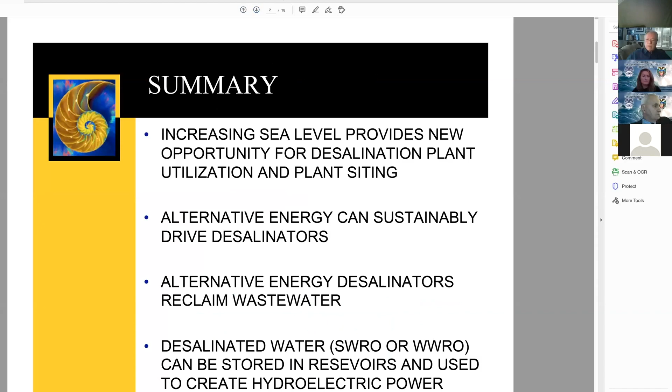In summary, what I'm going to do is - please bring up the slides, Todd. Let's go to the second slide. All right, let's go to the next one. So basically what I'm talking about for desalination is using alternative energy to sustainably drive these processes. Alternative energy can also be used for reclaimed water, for wastewater reclaim. And extrapolating into the future, you could also use desalinated water to fill reservoirs to create hydroelectric power, which gives you a very interesting source of water in off-peak and non-daylight periods. Next slide, please, number 3.

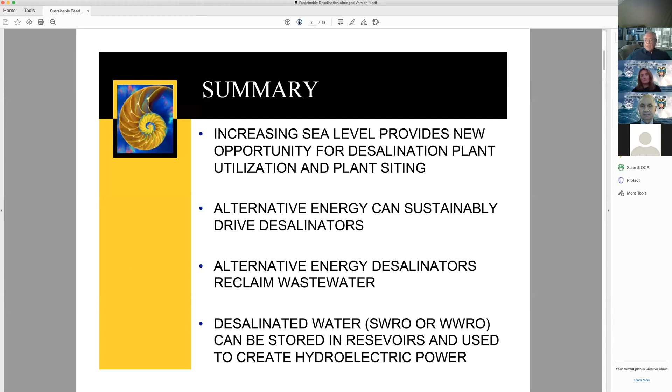The Legislative Analyst's Office of California's report from August 2020 indicated that sea level rise was going to cost California $8 to $10 billion by 2030, with as much as a 1-foot increase in sea levels. By 2100, this could reach a 7-foot increase, and storm surge could increase it significantly. We've had a king tide here just in the last day. Slide number 4, please.

Desalination growth has also been going on at the same time. Globally, water demand has resulted in incredible growth in the use of desalination to provide a reliable source of water, driven by global population demand. You have increased water consumption, but you also make more wastewater when you do that. These cities that consume more water produce more municipal wastewater, which is an opportunity for desalination to recover that water.

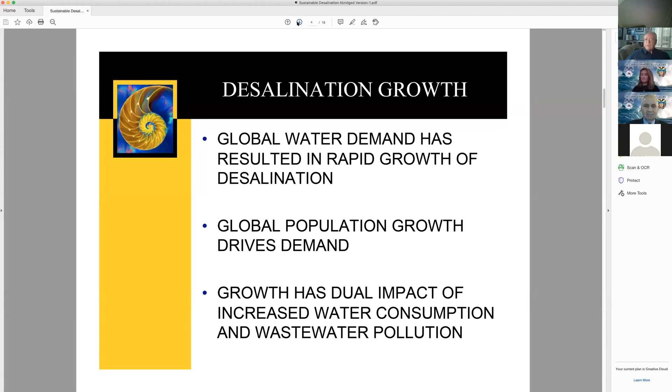If you look at the global growth in desalination, in 2015 there was about 528 million gallons per day of seawater reverse osmosis being installed globally on that annual basis. By 2019, it was up to 2.1 billion gallons a day, growing at about 40% per year in the use of seawater desalination around the world. Wastewater is not growing as rapidly, largely because it gets used predominantly in developed countries, but it is showing a burst of growth right now as people recognize the importance of wastewater reclamation and what a good tool it can be.

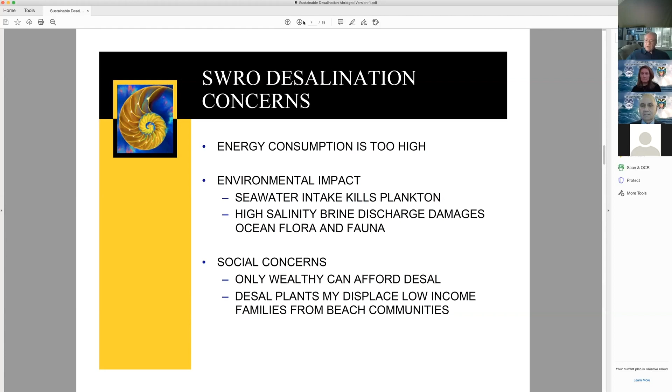There is a non-fossil fuel way of using desalination technology, and that's what I want to talk about and hope we can do here in California. There's a technology where you submerge the desal plants and operate them without fossil fuel consumption, using the hydrostatic water pressure of the sea to drive the process. You can use solar or wind power to transfer the fresh water to the shore. If you use fossil fuel to transfer the water from these seawater plants to shore, it saves 50% of the cost of a land-based desal plant. But if you can use solar or wind power, then you reduce that energy consumption to virtually nothing other than the capital cost to put in the solar and wind power plants.

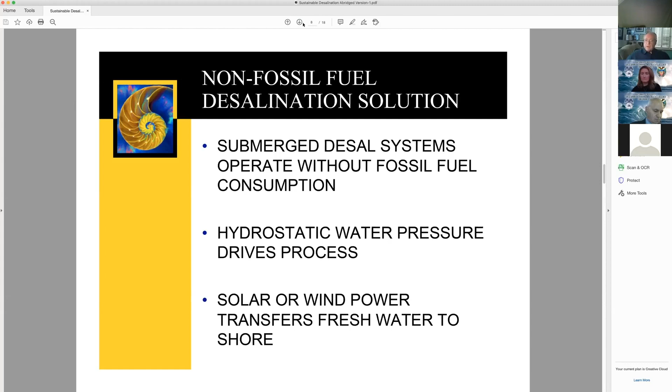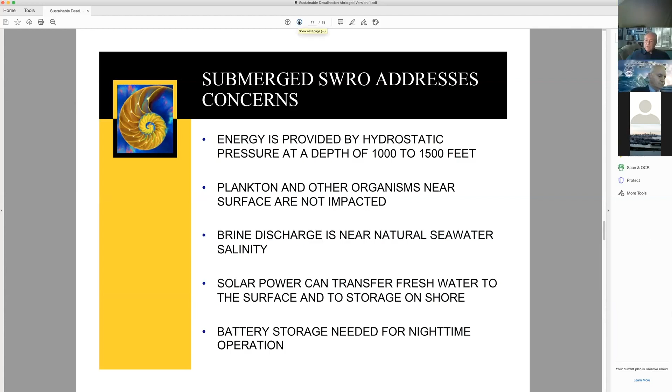Submerged desal plants have a slightly higher capital cost. Location requires about 1,000 feet of sea depth, not too far offshore. You must have the solar system coupled with the desal plant, and you will need a battery pack. But you have a new water supply without fossil fuel consumption, which helps California reduce its CO2 footprint, and this would do the same anywhere else it was used. This should help us with global seawater or sea level rise concerns. Next slide, please.

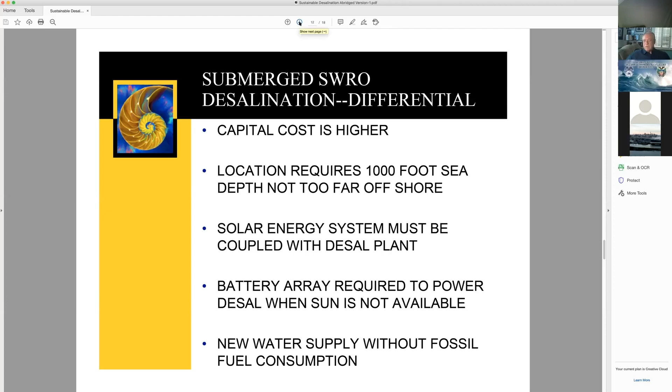Wastewater can also use alternative energy and be driven by it. You cannot use hydrostatic pressure like you can with seawater, but it is used heavily for recycling municipal and industrial wastewater. It is growing fast, not as fast as seawater, but growing. Approximately $800 million was invested in 2019 in wastewater reverse osmosis installations, and it uses less energy than seawater RO, even when using fossil fuels. That's one reason it has been widely adopted in the United States and other industrialized nations. Next slide, please.

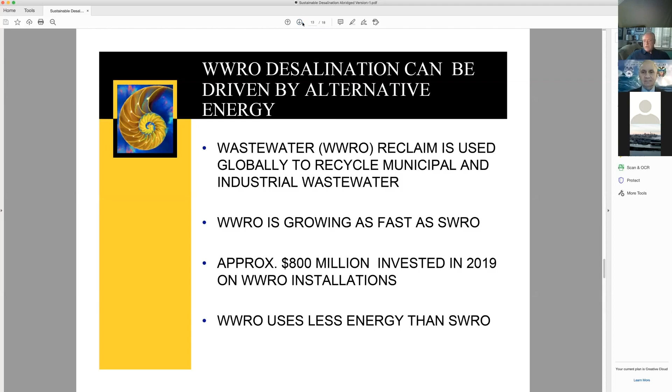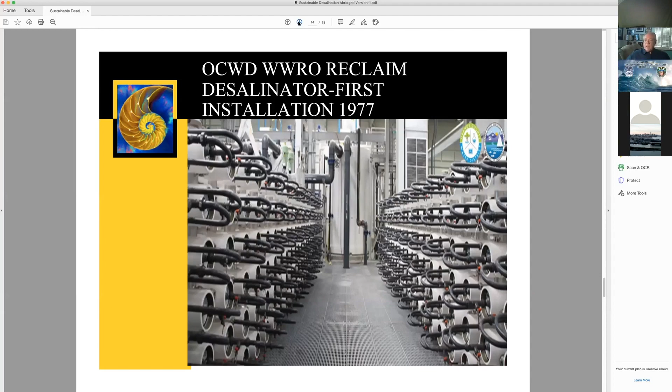This is a picture of the Orange County Water District wastewater recovery plant, which they call their groundwater replenishment system. They take the recovered water and put it into the groundwater, where it mixes with their natural drinking water and also prevents seawater from intruding into their natural wells. This plant was originally installed in 1977 and has been expanded a number of times, currently producing 130 million gallons a day of drinking water for the Orange County, California area. Next slide, please.

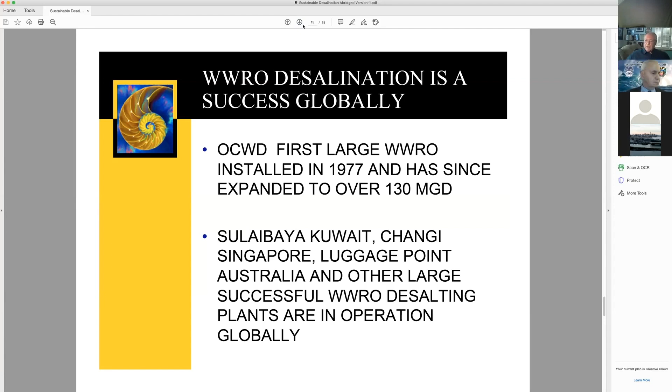Orange County was the first and the biggest so far. However, these plants are all over the world, in Kuwait, Singapore, Australia, and there are many other very large successful wastewater desalting plants. So this is catching on widely on a global basis. Next slide, please.

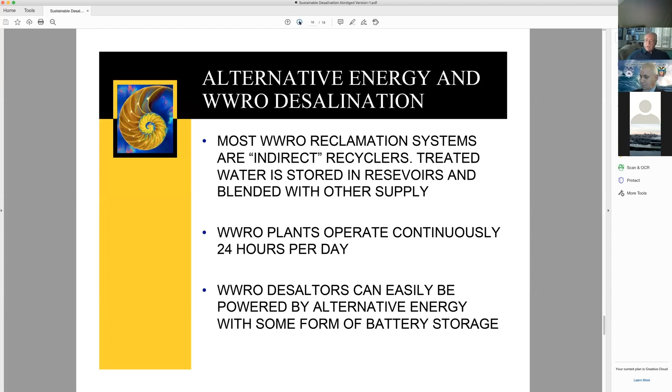Most wastewater reclaim plants are indirect recyclers. That is, they treat the water and then put the permeate, the drinking water, into a reservoir or, in the case of Orange County, into their groundwater wells where it blends with naturally occurring waters. Wastewater plants operate continuously 24 hours a day. They can easily be powered by alternative energy like solar and wind power, and would need some form of battery storage for nighttime operation. Next slide, please.

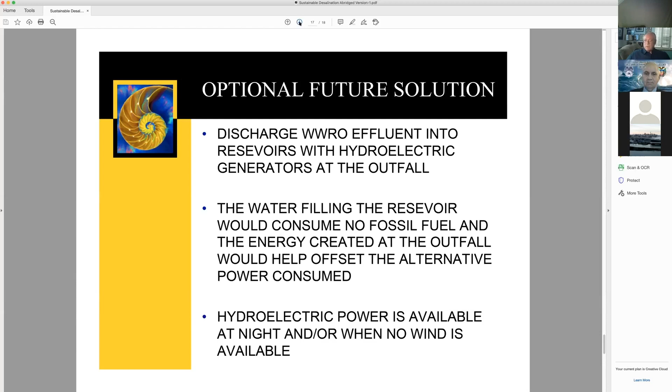An optional future solution, and this is stretching things significantly, but it has some merit. This idea came from a gentleman who wrote an article in a newspaper recently that Stas passed off to me: discharge from wastewater effluent into reservoirs, where the outfall of those reservoirs could include hydroelectric generators, so that before the water gets used, it passes through the generators to produce some power. Filling the reservoirs with water does not consume fossil fuel by itself, though it would consume fossil fuel to fill them unless you can use solar power to do it. The energy created from the outfall would help offset this and gives you a source of energy at night, which is one of the real nice benefits of hydroelectric power. Next slide, please.

So basically the proposition is that sea levels are rising, the use of fossil fuel and internal combustion engines is being restricted, new sources of fresh water are needed, and desalination powered by alternative energy can provide a solution addressing all of these crucial issues. So that's my presentation, Stas. Thank you very much for the opportunity, and if there are questions, I'll be happy to address those.

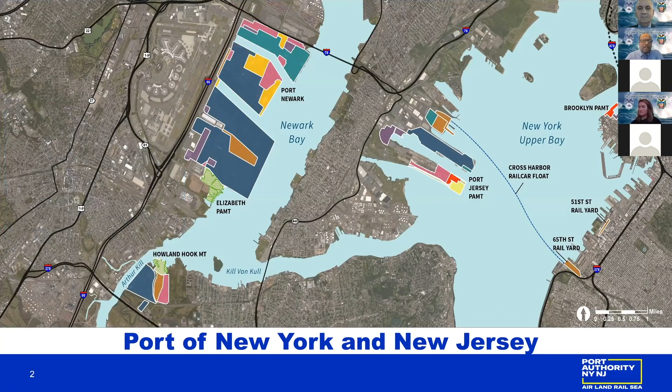Superstorm Sandy struck the port on October 29, 2012, with winds up to 90 miles per hour. As depicted in the photos, extensive flooding occurred due to the storm surge along with a high tide. The New York Harbor recorded storm tides of more than 9 feet above mean higher high water. In preparation for the storm, waterways closed on October 28th and did not fully reopen to vessel traffic until November 4th. Our facilities incurred $112 million in damages. Our individual port tenants claimed as much as $17 million in damages. The impacts of this storm included limited capacity for weeks with major supply chain effects, lack of electrical power for several days, damage to cargo handling equipment, imported autos, cargo loss, temporary flooding, and destroyed crane motors.

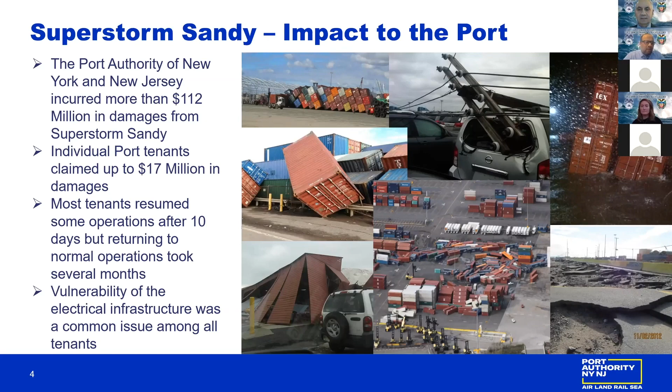One common vulnerability across all of our tenants was the electrical infrastructure, which was flooded during the event. So what do we do about it? In the short term, we updated our hurricane preparedness plans to identify high ground staging areas for equipment to ensure that they didn't get flooded or destroyed again. We also executed a Sandy recovery program, partly funded by FEMA, to replace the damaged infrastructure and upgrade facilities to protect against future storms.

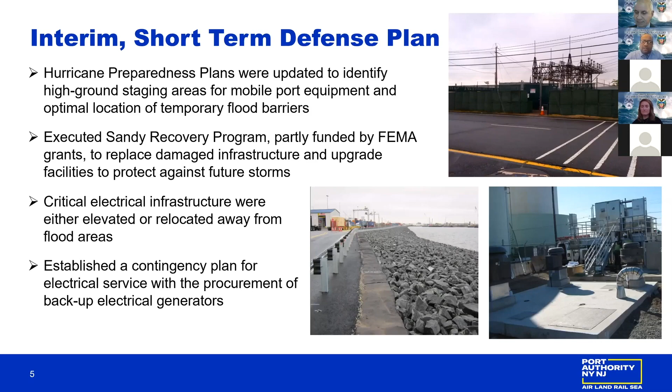As a lesson learned, critical electrical infrastructure were either elevated or relocated away from flooded areas. And we established a contingency plan with our partners to make sure that we had available backup electric generators against a future storm.

As far as the long term, over the past several years, the U.S. Army Corps of Engineers, with the collaboration of non-federal partners and other regional agencies, have been studying the feasibility of protecting the entire New York, New Jersey harbor. The alternatives being studied range from no action to surge, gate, and flood wall alternatives.

Though this study is currently on hold pending federal funding, it represents the region's holistic response to future storms as far as defense. If this study were to yield a project, a structure like this will serve as a first line of defense for the port and the rest of the region.

Though this is an ambitious project and hopefully will become a reality in the future, it will take many years before it's implemented. The Port Authority has already updated its resiliency and sustainability design criteria in order to protect our facilities against future storm events.

Every project needs to comply with the criteria, which includes the analysis of sea level rise and wave action, and the selection of flood event based on the specific location and service life of the new infrastructure. Sarah will provide more details on this in the next slides.

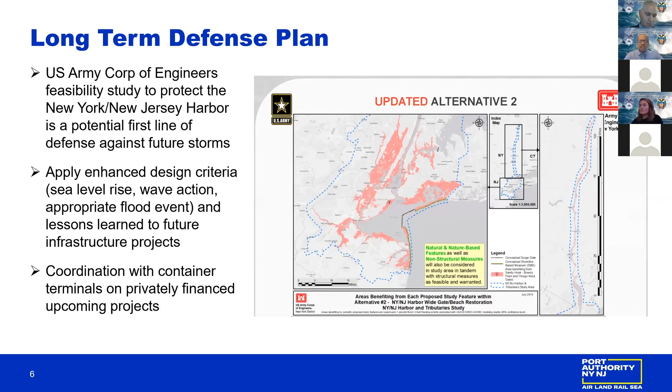Additionally, the port actively coordinates with our tenants on the inclusion of resiliency and sustainability into the privately financed projects that they are executing. My last slide today is going to talk about the wharf replacement study.

We studied this a couple of years ago to ascertain the condition of our 13 miles of existing wharf system so that we could provide recommendations as far as rehabilitation and reconstruction. One of the major challenges and decision points throughout this study is whether to rehabilitate or reconstruct our wharf system to a new elevation to comply with new standards.

Based on a worldwide outreach of our industry, what we found out is that for new port facilities, they build to the new elevation criteria and new resiliency criteria. However, for existing infrastructure, for the most part, they remain at existing elevation.

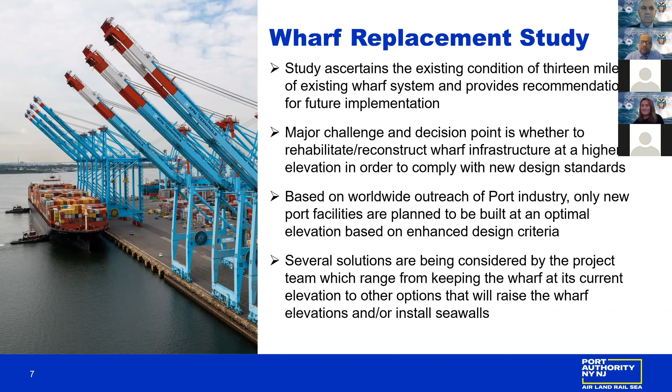And obviously, in the study, several solutions are being considered by the team - again, keeping the wharf at the same elevation, or raising the wharf elevation, or even the thought of installing seawalls to protect our facilities. With that, I'll turn it over to Sarah, who will provide you with more details on our criteria.

Sarah? Hello, thank you, Jorge.

Yes, my name is Sarah Colacerdo, and I'm the Senior Climate Resilience Specialist in the Engineering Department at the Port Authority of New York and New Jersey.

And you all know that port facilities are on the front lines of climate change, and I want to thank the Propeller Club of Northern California for having us and convening all of these experts and leaders and practitioners from around the world to share ideas on how to adapt to climate change's impacts.

So I want to start by acknowledging how lucky I am to work for an agency that has recognized and championed climate resilience for a pretty long time. In 2008, our Board of Commissioners updated our sustainability policy to mandate that the agency develop strategies that reduce the risk posed by climate change to its facilities and operations.

And prior to this update, the sustainability policy was essentially geared towards reducing greenhouse gas emissions, whereas the update explicitly recognized that some amount of climate change is baked into our future, and we need to understand, anticipate, and adapt to these impacts. And I really can't overstate how important it is to have an adopted policy that provides a solid foundation to address climate change, no matter what the political climate is.

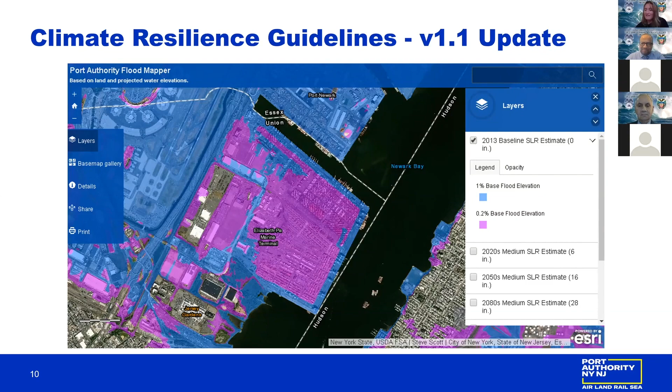Through experience and vulnerability studies, including the wharf replacement study that Jorge mentioned, the engineering department has learned to screen ports projects for various climate-related vulnerabilities. When we approach a project, we try to think broadly about potential impacts, including those that are creeping and chronic, those that are acute and short-term, and also interdependencies and cascading impacts. The goal is to bake in resiliency into every small, medium, and large project.

Some general impacts we anticipate if we were to not take resilience measures would include higher storm surge elevations damaging electrical and mechanical equipment and crane motors, the relative air draft of ships to wharves and mooring systems changing, possibly placing greater or different stresses on the existing fenders and mooring systems, creeping submergence of our outfalls, which would reduce the effectiveness of our drainage system, reduced underdeck clearance that might lead to more challenging and more costly underdeck repairs and inspections, accelerated deterioration of bulkheads due to continued flushing or inundation that could lead to loss of fill and subsequent upland sinkholes. And in the lowest lying areas towards the very end of the century, we think we might start to see inundation during high tides causing nuisance flooding.

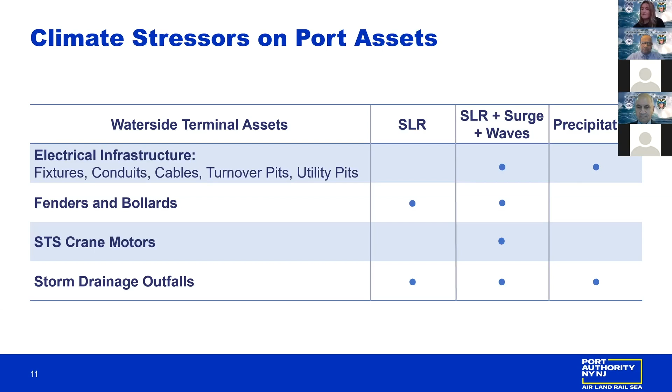Continuing upland from the water, we're mainly worried about storm surge events and to a lesser extent, extreme precipitation, which without resilience measures could lead to higher and more extensive storm surge, damaging buildings and cargo and electrical and mechanical equipment and crane motors. Rising groundwater and the reduced capacity at the outfalls could lead to reduced drainage capacity throughout the system, and overtaxing the system, or maybe too small of a system, would compound the issues of extreme precipitation causing potentially ponding and sinkholes.

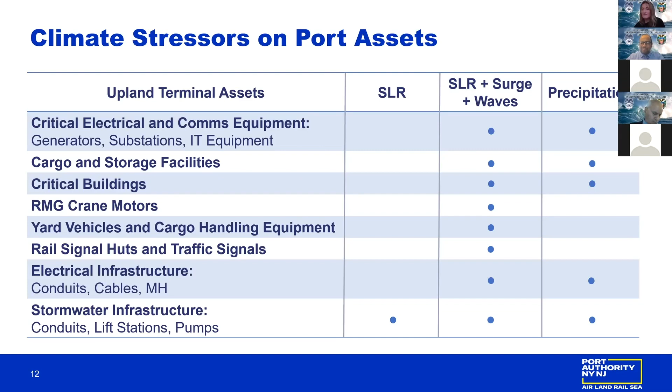As an engineering department, with every challenge we add to our menu of design options to try and increase protection at our ports from climate impacts. Some strategies require complete implementation across a facility before they create value, while others can be effective as individual or incremental projects that can be scaled and layered to increase protection. These design strategies include raising, enlarging, or increasing the number of outfalls, installing backflow preventers, protecting critical assets by elevation or dry and wet flood proofing, constructing seawalls at the perimeter, and when building new facilities or replacing wharves, looking into raising the wharf deck or adding provisions for future deck raising and/or adding seawalls.

We've heard the term adaptive capacity a couple times yesterday and today, and that's really important to us, especially when you don't know for certain what magnitude of sea level rise we might eventually experience, especially with really big investments. One example of adaptive capacity is adding structural strength to new wharves so that in the future, if need be, we can raise the deck or add a seawall, or both.

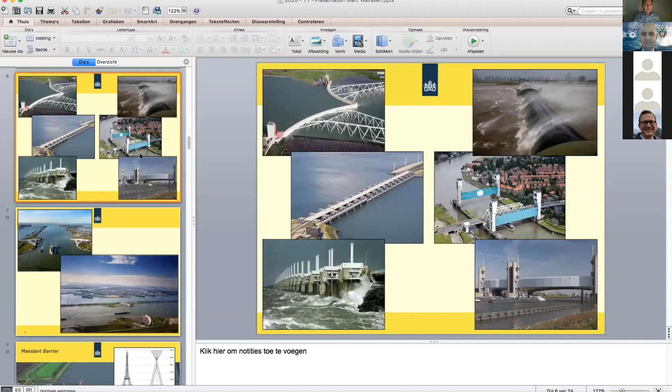So, thank you very much, I suppose you can see my screen now. We can. Okay, thank you very much for being with us today and for the invitation.

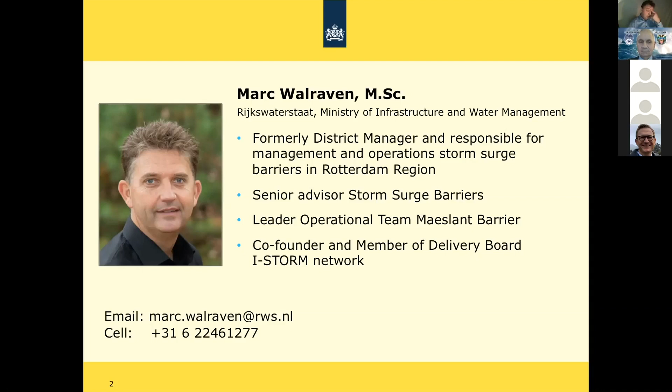As you said already, I'm from the Rijkswaterstaat organization, which can be compared to the Corps of Engineers, with whom we work a lot as well. I'm not a real specialist, but I've been a manager in Rijkswaterstaat for a long while, and actually in practice on the storm surge barriers, responsible for the maintenance and operations, also for the Maeslant barrier. I'm still the leader of the operational team, so when we have a closure on the Maeslant barrier, I will be in the lead of the operational team. So I will share some practical experience today with you all from that perspective.

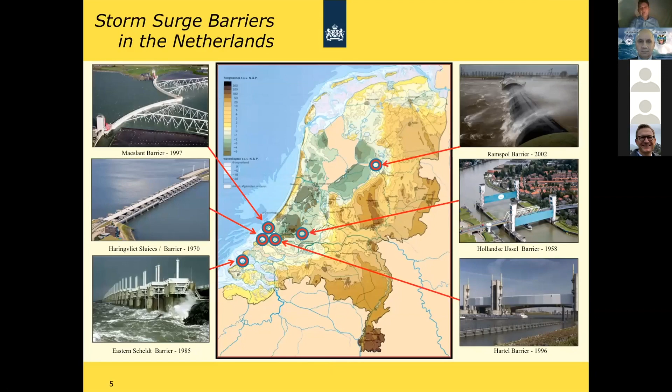You can see here an overview of the Dutch storm surge barriers. Five of them are in the southwest region, built in response to the storm in 1953. The upper right one was built later on, so it's not part of the Delta works. These are the six storm surge barriers we currently maintain and operate in the Netherlands. It's good to have a closer look at all of them - what I think is very important to recognize is that they're all different.

That's something that happens worldwide, and there are reasons for it. Every location is different, the depth of the river is different, the function of the river might be different, the age in which they were built, the technologies available, the money available, even political preferences might be applicable. So all that means those storm surge barriers will differ, and you can imagine that gives some challenges for maintenance and operations later on. That's why I show you this picture a little longer, to keep that in mind.

Oops, it's not going the right way. Sorry for that.

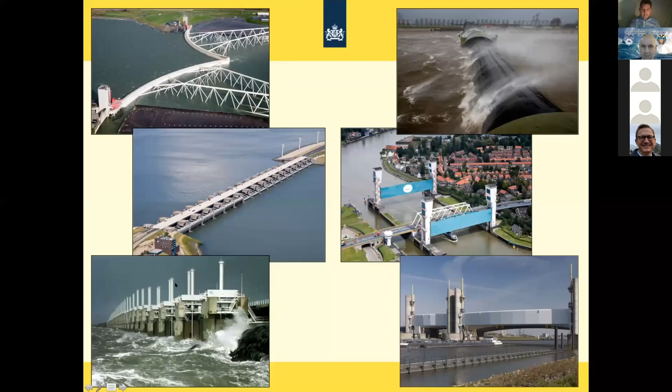This is the Maeslant barrier. It's one of the biggest robots in the world. You can see here it's pretty close to the Port of Rotterdam, which is in the background. The Port of Rotterdam is not being protected by this barrier as it's on higher ground, but I think the next speakers will talk about it as well. I'll stick to the Maeslant barrier itself. As I said, it's a really big robot, because it was originally designed to operate automatically.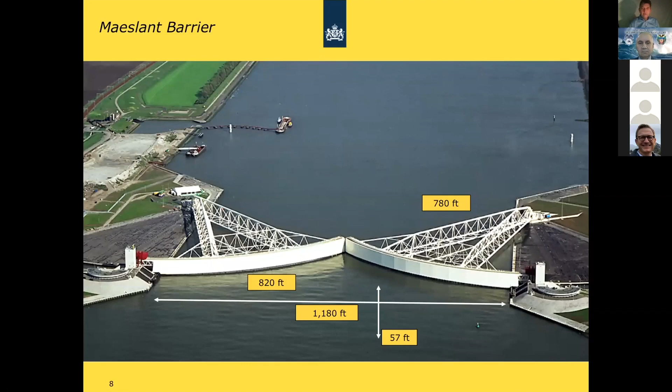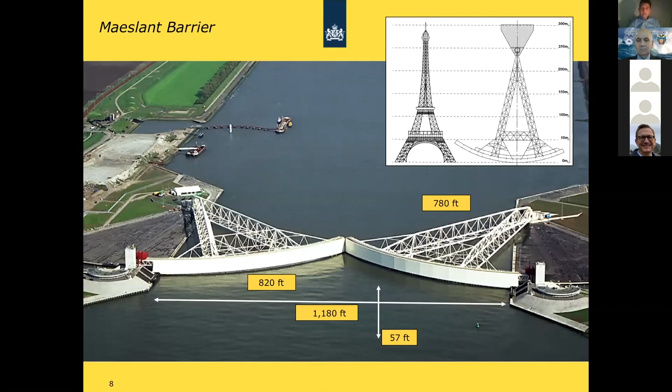This is the barrier I mentioned. I'm leader of the operational team, so I've experienced what it is to close this barrier and actually shut off the Netherlands. And it's big, pretty big — you can compare it with the Eiffel Tower. The joke we sometimes make is, we have two: one on the north side and one on the west and south side.

This is something we have in common as well, I think, because the design and building period of these kinds of structures always gets a lot of attention and financial support, so a lot of people are attracted and interested in really doing the design phase. But to be honest, the challenge begins afterwards, if you have to maintain, manage, and operate these structures for more than 100, even 200 years. That's the thing I'd like to share with you, the lessons learned that we have. There are many, many lessons learned, and I can only share a couple, but it's good to keep those ideas in mind.

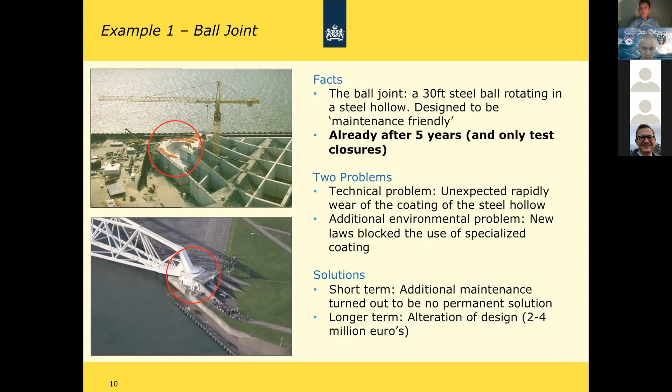So just two examples for now. This barrier was constructed with a kind of ball joint — a 10-meter diameter, 30-foot steel ball rotating like a shoulder wrist. We thought it would last for very long, but already after 5 years we got problems. We got technical problems, an unexpected rapidly wear that we hadn't expected. Secondly, there were additional environmental rules — the law changed and we weren't allowed to use specialized coating anymore. So there were things that weren't foreseen. We had to do additional maintenance in the short term, but on the longer term, after only 5 to 7 years, we had to do a redesign, which of course was pretty costly, just as a technical issue.

Secondly, even for this barrier, in 2006 we were front page news. It says here in Dutch, so I can imagine not all of you can read it. It was originally designed as a fully automatic storm surge barrier. The idea in the '80s when we designed this barrier was that people shouldn't interfere, because then it's not as reliable — it should be a computer. And as we all know now, a computer is not always available. So we discovered that the reliability of this storm surge barrier was not 1 in 1,000, but was 1 in 10. So within 10 years, we had to do some redesign.

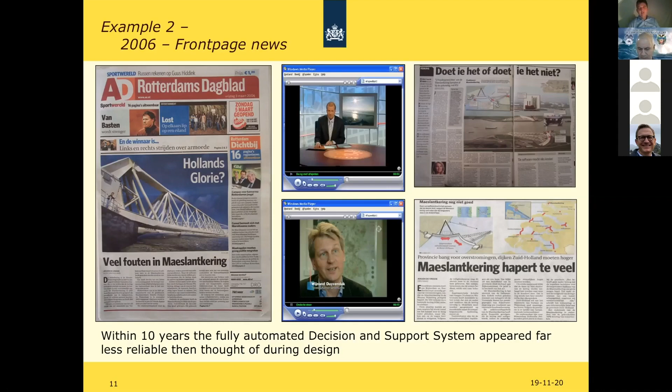At that moment, we decided to introduce human beings in a more important role in the operational team, and we moved towards probabilistic asset management to be sure this barrier is always as reliable as it should be. That's how it works in the Netherlands, because we have a law that defines the reliability rates of all dikes, and within those dike rings we have those storm surge barriers. So we have a certain level of reliability we have to aim for, and we can calculate every action we take to see if it contributes to that reliability. During all these years — and these are just two examples from one barrier — if you saw the first slide with all the differences between all those barriers, you can imagine there are many, many challenges to face with all these different structures.

I just picked out some examples to give you an impression. There's a lot of focus during the optimizing from design. So when design groups are starting the design philosophies, it's usually not taken into account what it means for maintenance and operations. There are even situations where storm surge barriers are being designed and it's not even known which organization will be responsible for maintenance operations. Our advice would always be to define first who's going to be responsible, and have them involved in the design process, because they will ask different questions as they feel what it means to be responsible for maintenance operations.

Secondly, the design is mostly unique, a prototype. As you saw, they're all different, and my expectation is that worldwide it will stay different as well. One lesson learned is that subsystems are generally designed for other use. For example, in the gate of the Maeslant barrier, we use pumps originally constructed for the sewerage industry, meaning 24/7 use in a wet surrounding. But in our barrier, they stand still and totally dry. So we have to figure out ourselves the best maintenance strategy for these kinds of parts, to be sure they operate at a certain level of reliability when needed. As you know, the Maeslant barrier has only been used for storm conditions 2 times in 25 years.

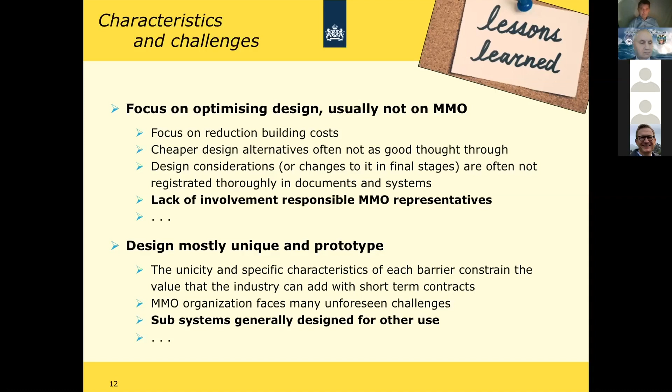There will always be stress on the required knowledge and experience. That's often underestimated, because a lot of knowledge is gained during the design process, but you need this knowledge afterwards when doing maintenance operations. You'll find out there are failures, or parts that respond differently than you thought, as I showed with two examples within 10 years of the Maeslant barrier. So the high reliability requirements really demand professional asset management to be operational in your organization. That's a real challenge if you have to maintain such a structure to a certain level of reliability for 100 or even 200 years.

Regulations, policies, and organizations change frequently, with unpredictable but significant influence. For example, I work for the Rijkswaterstaat organization, and we're responsible for these kinds of structures. I think we're doing an okay job, but even our organization is influenced by politics making certain policy decisions. Often that doesn't really fit these typical structures, because they demand more knowledge, sometimes more investment, and more understanding of how they really work.

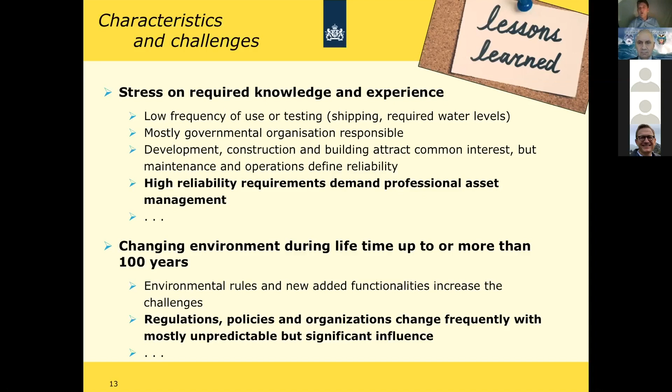Within that perspective, we're gathering lessons learned, both within our organization and worldwide. We haven't worked them all out already, but we've defined four themes, four areas: politics, policies and organization processes; technical innovation; and knowledge and craftsmanship, under which we can capture those lessons learned. That's something we'd really like to share with others before they start designing and building storm surge barriers, so they keep those lessons in mind. It's maybe not that difficult to design a structure like this—it's a little complicated of course—but the maintenance, operation and organization are crucial. That's something we'd advise paying as much attention to as possible.

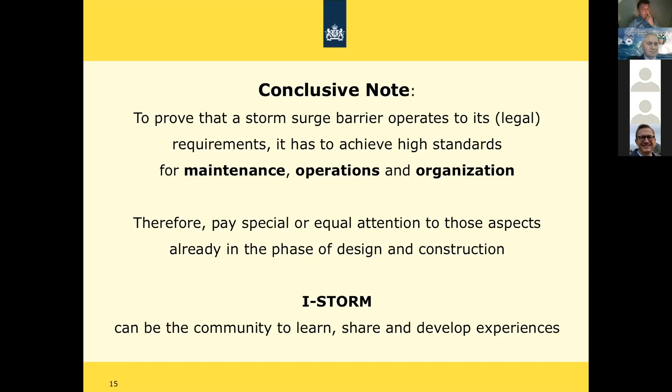Therefore, we have an international network, I-STORM, that can be an international organization to learn from in that perspective. To tell you a bit about the international I-STORM community, this is Andy Batchelor, the barrier manager of the Thames Barrier in London, and myself.

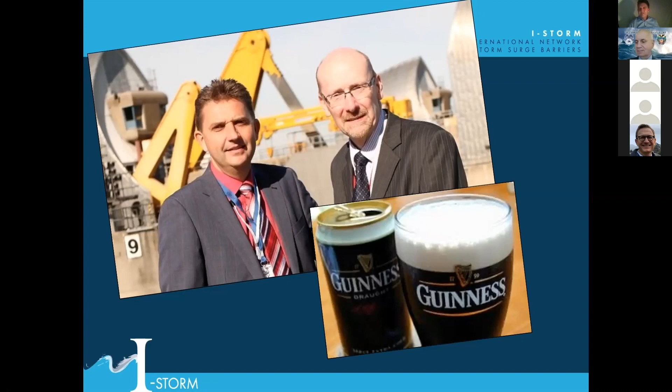We met in 2005 at the Thames Barrier. That evening we went to a bar, drank a Guinness, and to be honest, another one as well. There was a lot of recognition—we really recognized that we operate these complex structures within a bureaucratic organization, within government, with special relations to contractors, high challenges related to contractors, cybersecurity, and other aspects. We thought we had to start some kind of cooperation because we really understand each other. That was the basis, a good glass of beer, to start the I-STORM network.

Nowadays we're an international network. You see a big group here at the Thames Barrier, one of our annual meetings, which we have now.

Our aim is to better protect people, places, and property from flooding, and to share the scarce knowledge and experience we have to help each other, and also help others building barriers worldwide, doing projects together, doing research, capturing lessons learned and sharing those with each other. Nowadays we have a kind of organization, but it's still based on informality, because what we want to do is bring specialists together and have them learn from each other and from what they experience in the field.

The Corps of Engineers is one of the 4 core members now, and we cooperate a lot with them. I just heard people from New York - I was there in November to share lessons learned with people from Philadelphia, New York, and the Corps of Engineers. So we work with them, and here's an interesting picture of the core barriers: upper right, Venice; bottom right, Thames Barrier; bottom left, New Orleans; top left, the Maeslant Barrier. You see, they're all different - it's not only in the Netherlands, it's worldwide.

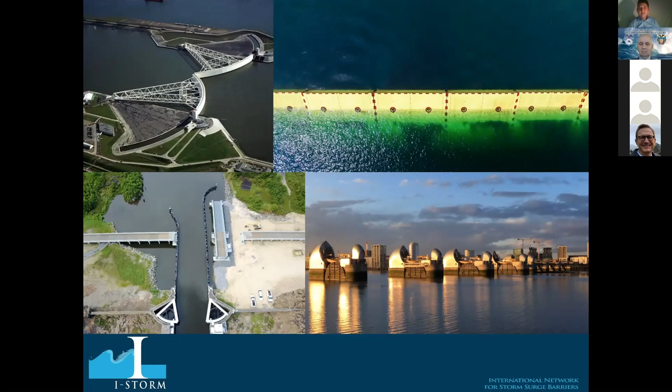Nowadays I-STORM has, apart from the 4 core members, also barrier members - organizations that are building or have storm surge barriers - and associate members, all kinds of companies and technical universities. But you only can become a member if you really bring some knowledge into us. So it's not a platform to gain new work, it's a platform to share knowledge. We get a lot of applicants who want to join, but only when they have real experience and can share it with us will they be allowed to join this knowledge network.

For example, it was mentioned yesterday by Bill Merrill and Tony William from GLO and Texas A&M - we facilitated a design workshop at Galveston. In that workshop about 40-50 people from the network joined and shared knowledge and expertise for the benefit of the Corps of Engineers, who had to design the first storm surge barriers. We don't say what's good or right or wrong - we only say, this is our experience, make use of it. It's not that we decide what's good or wrong.

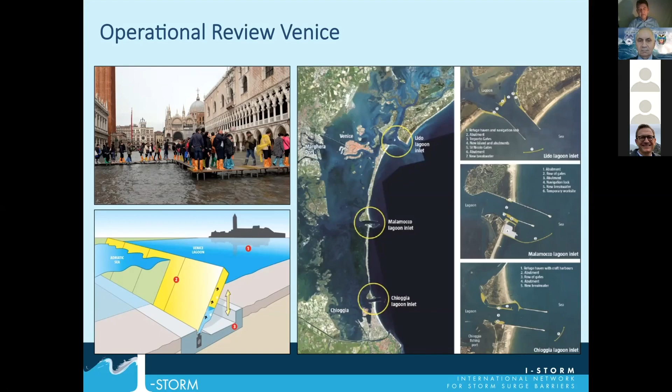And we do it at other places as well. For example, earlier this year we went to Venice and had an operational review, just to help them make the change from an organization that's building into one that will do maintenance operations for the next couple hundred years. Because such an organization will face real challenges ahead, as I just showed you a couple of them and can tell you more. We also had a visit to New York and Philadelphia earlier, and we work very closely with the maintaining organization in New Orleans at the moment.

So just to give you a brief overview and hopefully stress the urgency to have an organization in mind that will be responsible for maintenance operations, to incorporate that within the design phase when these kinds of structures are thought of. Thank you very much.

Mark, thank you very much. This is really a global view of the problem, which I think is very urgent for us to have. Obviously you've already done a lot of work in Galveston, New Orleans, New York and Philadelphia, and these insights are very valuable. I would say the most urgent thing for us is that we really need to start fast tracking the deployment of these kinds of barriers. We heard yesterday the progress being made in Texas, and we're going to hear a bit later about San Francisco on a more modest level. Clearly Texas and New Orleans have benefited from the insights and ideas from Rijkswaterstaat and from I-STORM. One of my takeaways is that investment in this infrastructure is not a static venture - it's a constant movement of change and expertise of varying conditions, technologies, and unfortunately varying politics.

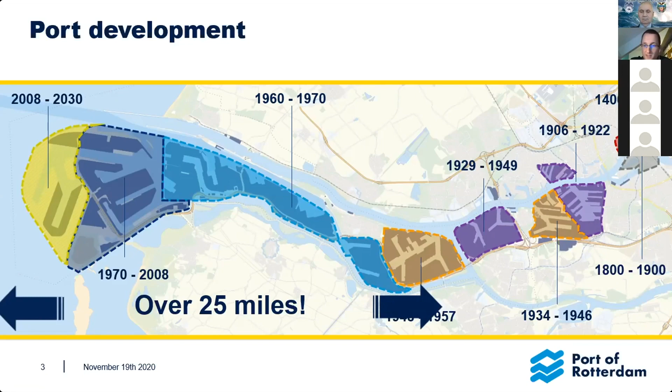This is a slide you have seen yesterday during the presentation of Jeroen Aerts. You can see that the port expanded during the centuries in a seaward direction. The elevation of the port has also improved, has been higher and higher, and that's of course due to it being closer to the coastline, and also due to the fact that insights about sea level rise have slightly changed. You can see that most of the port's land was developed until 1970, so the elevation is mainly based on insights from about 50 years ago. You can understand that insights have changed, and especially in these parts developed until 1970, there's a lot of oil and chemical business, so there's a lot of value and possible environmental impact as well.

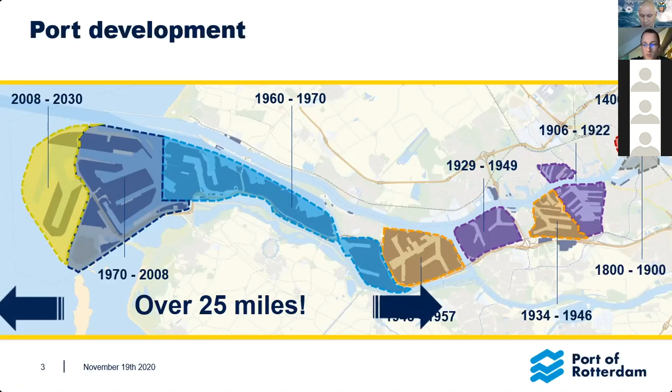Jeroen told a little bit about Maasvlakte 2, which is the last expansion we had in the seaward direction. I will shortly tell something about this as well, also some figures about it. Maasvlakte 2 is really an interesting project, also because of the stakeholder process we had. We started plans for this land reclamation in the late 90s already, maybe in the 80s, I'm not quite sure.

If you think about developing seawards, some stakes are at risk—for example, nature, ecology, recreation, fisheries, etc. So there's quite a probability that you have some opponents during the realization of your plans. It's very important to approach all stakeholders in a way that you can work together, develop your plans, but there is also something to gain for them. For this development, we used the mutual gains approach. The aim is turning opponents into a partner position. Of course this won't work for every aspect and every stakeholder, but at a certain point in time there is enough support to go to the next step of the project, and that's the way we did it.

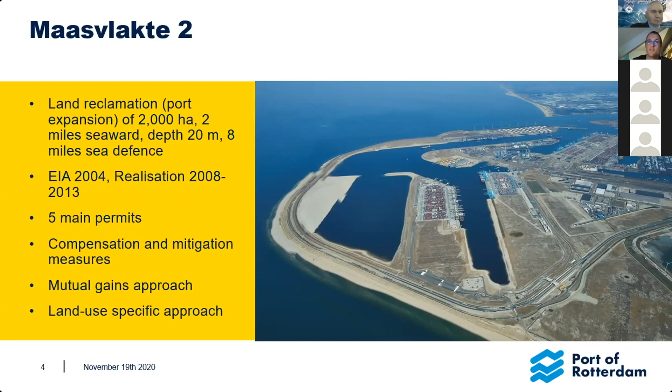There are storm surge barriers. Mark told about the Maeslantkering, of course. We are very happy with the Maeslantkering because it's an open barrier, which is very positive for shipping, for example, instead of a sluice at this position.

From a technical point of view, the elevation is different, but also from a legal point of view there is a large difference, and that's very important for our adaptation strategies. The government is completely responsible for all dikes and embankments, keeping them at a reliability rate, protecting people and companies living in those polders, and that's regulated by law. In the outer dike area, there is no law, so we are outlaws.

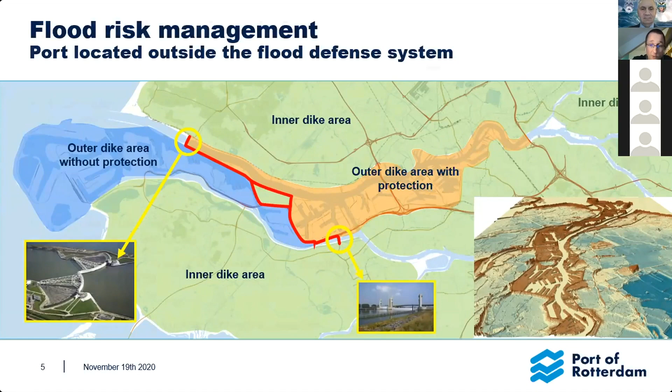There's only a policy, and that policy says that asset owners in outer dike areas are responsible for damage due to flooding themselves. Then you come to the question, who are the owners in this outer dike area? Of course, Port of Rotterdam, we own a lot of land here and give it to our tenants, but they have a lot of assets themselves, like oil tanks and infrastructure. There are railways, Rijkswaterstaat owns some assets as well, and utility companies - there are a lot of owners. So it's quite unclear what the exact governance is, what the responsibility is for everyone owning assets in this outer dike area. So you can also ask yourself, who's responsible for sea level rise and flood risk events?

This is the question on which we started to think about making adaptation strategies. You could start from that point and have an enormous discussion about the responsibilities, but we started to analyze the problem instead, which was a good decision, because if you analyze the problem, you really know what problems you have - do we have any problems at all? And after that, you can start a discussion about possible measures.

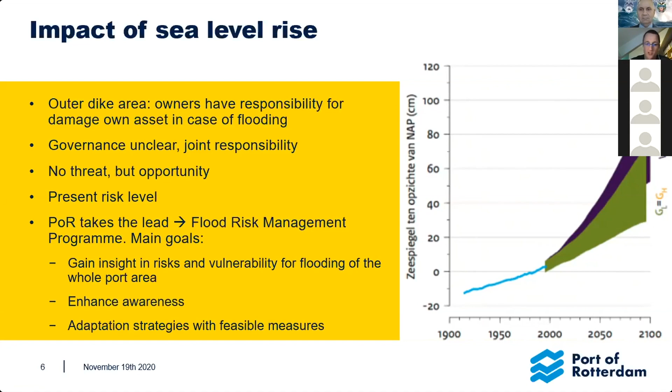So we started to develop our flood risk management program with the goals you see here. We had to gain more insight into the risk and vulnerability, because due to the high elevation there was not much awareness about this topic, and we had to make adaptation strategies as a result. Now, how do we make it? I will tell you something about the methodology, which seems to be very logical - of course, we look at the risks.

And the risk, of course, is probability times consequences. Probability, like everyone, we make flood maps for different years, different climate change scenarios and probabilities. And this is also a flood map you have seen in the presentation of Jeroen yesterday. This is a starting point of this analysis.

Then we look at the consequences, and you can divide it into different types of consequences. And it's good to say that in the Port of Rotterdam, economic effects are the most important to have a look at. About this consequence, and especially the economic consequences, Matthijs Bos will tell you more in the next presentation.

What we did is not only a quantitative approach, but also qualitative. So we asked the tenants what are the consequences of flooding if you see these flood maps, and so we got a lot of insight into the total consequences.

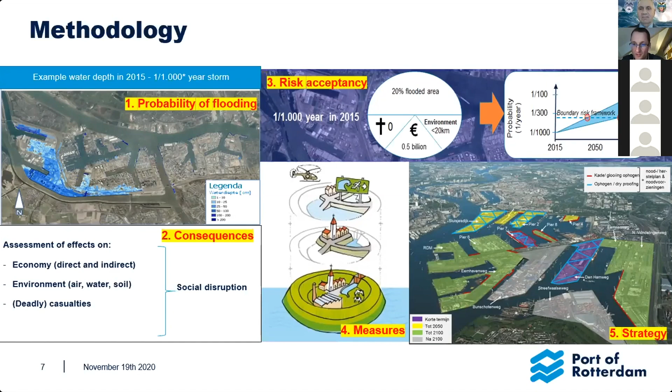It's very interesting to say also that if you look at the wharf elevation Mr. Chavez talked about, if there are quay walls, most of the time the best solution is dry-proofing and raising and protecting the vulnerable assets to a higher level.

Well, of course, we didn't do this alone, but we did it with a lot of stakeholders, again in different workshops, based on the joint fact-finding principle.

Something we really discovered is that from a cost-benefit ratio, you can easily conclude that measures are most effective if they are part of other investments. You are not going to take a specific measure for a lot of costs only for improving your flood risk.

That's crazy to do. I would mention one remark about the cost-benefit ratio, because we are speaking a lot about benefits, and it's good to think about the fact that it is not a real profit - not a real profit a company gains, or someone gains. It's only reduced damage. And if you are a decision maker and you have to spend money because you want to improve risk from 1 in 100 to 1 in 10,000, that's quite difficult. You don't earn anything because of this.

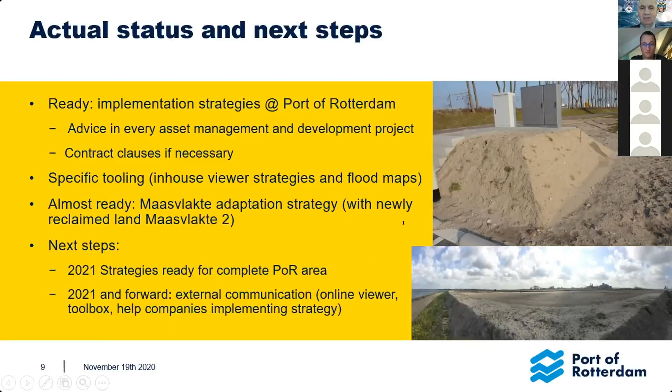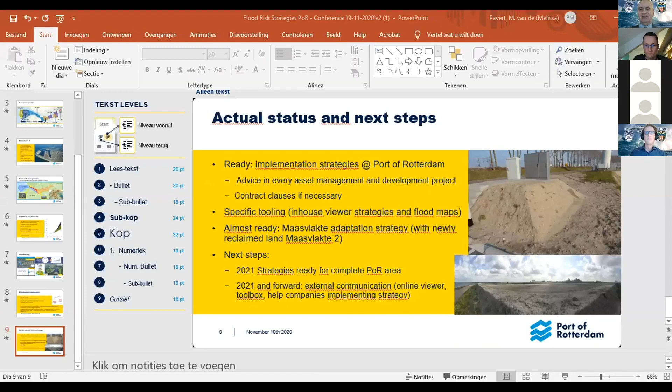Thank you very much for your return visit. Not everybody knows that you're a European famous concert and organ artist. So you have a day job at the Port of Rotterdam, and we have heard your very fine music that we still have at home, and appreciate your participation very much, Joost. Thank you very much. Thank you, Stas.

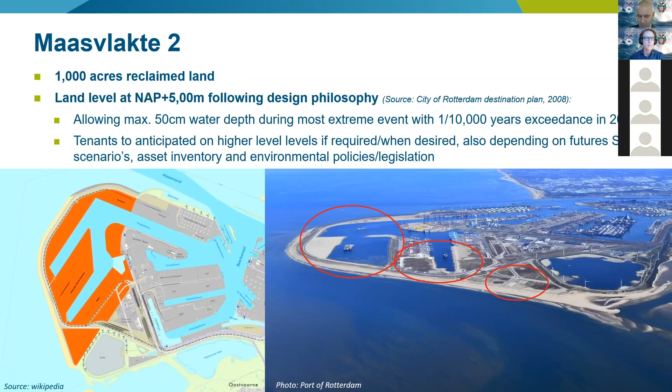So how to do that? We looked into the reference land levels. These can be different for use. And we also looked at 3 different land levels, each time with an increasing protection level, so decreasing in risk.

Then we looked at climate scenarios, so 2050 and 2100, with 1 foot or let's say 3 feet of sea level rise. For that, we created the flood risk maps or flood maps. By that, we have the basis to do economic damage calculations based on the land use or the asset inventory and these climate scenarios. On these damages, we can also calculate the flood risk.

Then the third step would be to do a cost effectiveness analysis and calculate the cost benefit. With this analysis, we can give a guideline for what should be the future land levels for different types of asset inventory.

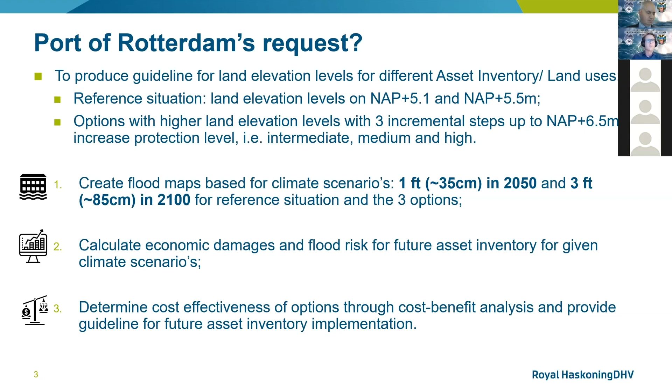So now we have this assessment, and what I already announced, we have in-house tooling called the Global Flood Risk Tool. This is a cloud-based platform that delivers accurate and comprehensive flood risk analysis. Let me dive into it briefly. So what does it do? It's a cloud-based platform.

It's online. We could bring back computation times from like 5 hours to a single minute. We could do that by using parallel computing, not just your desktop, but thousands of computers at a time, by clipping and combining rasters. So it's all GIS based, and it has high performance.

We moved away from license-based software as it could not handle the licensing connections. So we started our own software, created with open source packages like GDAL, Python, and libraries like NumPy and Pandas within Python, and GeoServer to store all the data we create. We use Amazon Web Services to do all the calculations.

And how does it look? You already see a picture of the user interface, and what are the capabilities of it. So I mentioned the online service - it's very fast, but also visually attractive.

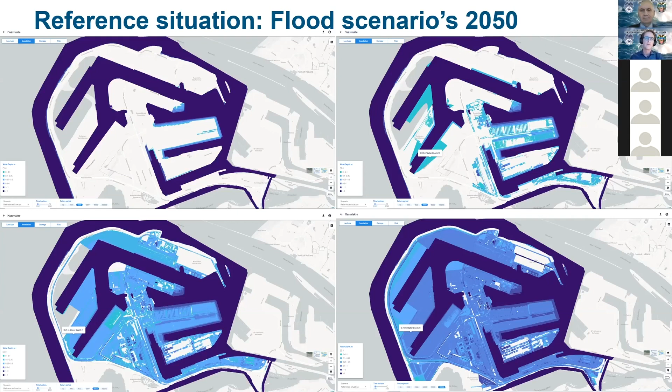Here you can also see the baseline of the design. So with, let's say, a 10,000 year storm, over 50 centimeters to maximum 70 centimeters of water. But then looking at 2100, the inundation increases, and you can see levels up to 4 feet.

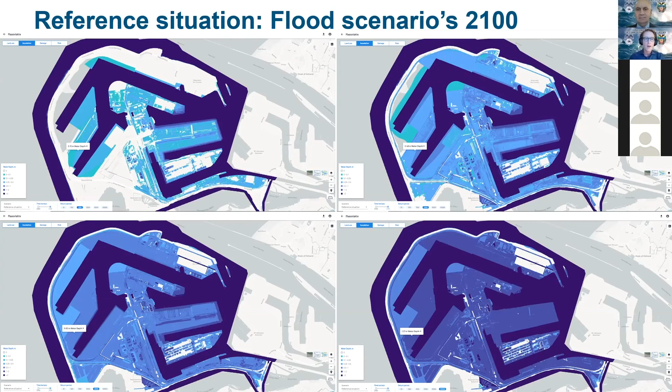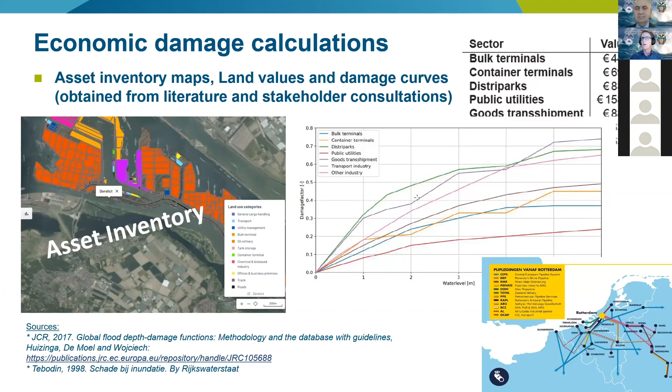Now you want to know how can you do the damage assessment. So we have this asset inventory on site. We use damage functions from literature, and by talking to the tenants. We have the land values from literature as well, but also verified by the tenants. And we did indirect damage assessments, as noted yesterday by Jeroen Aerts, and we worked together with him on this.

So then you get these damages. This is the same picture as shown before. We get these for all the scenarios we created, and based on that we can develop our flood risk.

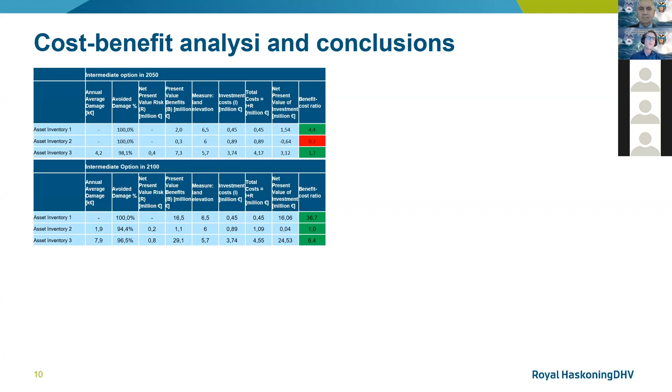This is my last slide on that. In the end, you have different asset inventories with all the outputs. You get all the KPIs which belong to the flood risk assessment, and in the end your benefit cost ratio. With that, you can map these for different asset inventories, different scenarios, and different flood risk or protection levels. Then in the end, you can do a recommendation or conclusion on what would be your advice.

So the conclusion I have here is it's recommended to at least further increase the land levels, as the preliminary land levels are maybe a bit outdated. It's good to make a distinction in protection levels and also look at different uses. And always, as stated before, not always the highest protection level is economically sound - it can be that a low protection level is better for your use.

And in the end, of course, now we just elevate the whole sites, but you should further detail your measures. Then depending on the type of assets, additional measures like crisis management would be required to further reduce your risk.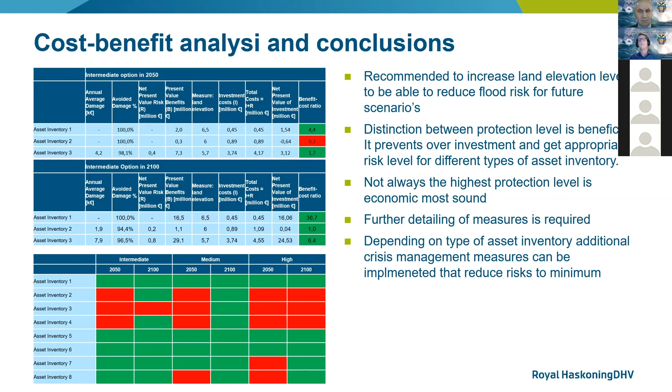Matthias, thank you very much for this. One of my first questions to you: are you working with anybody in the United States developing this kind of system? Not yet. Okay.

Let me check our questions for our panelists. We have a question: what is the lesson learned regarding keeping the knowledge and experience of operating and maintaining the storm surge barriers within Rijkswaterstaat itself, and not relying on contractors? What has proven to be the right balance? Mark, did you hear the question? Yes, I can hear it, I can read it, thank you.

I can tell you there's not an easy answer to this question. You could expect that our organization, Rijkswaterstaat, comparable to the Corps of Engineers, has a lot of knowledge within its own organization. But to be honest, after the building period we had some specialists connected to our organization with their knowledge and expertise, but they left the organization as well within a couple of years. And we had a lot of changes within our organization.